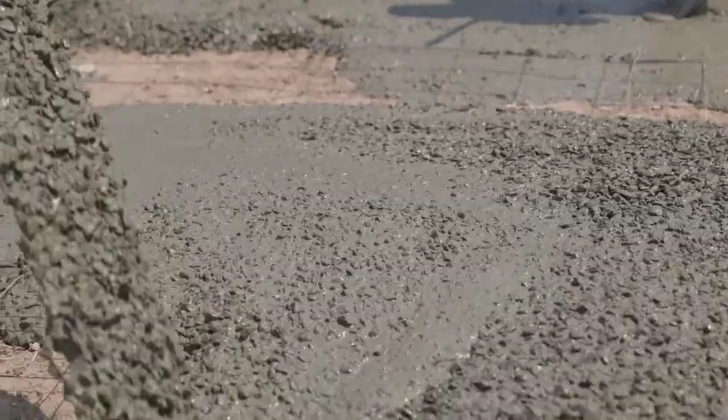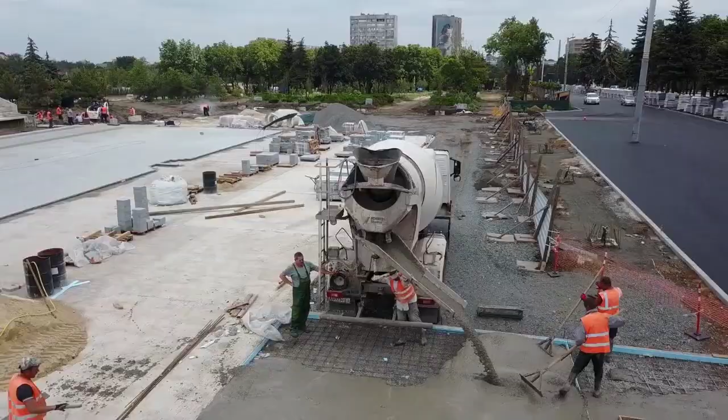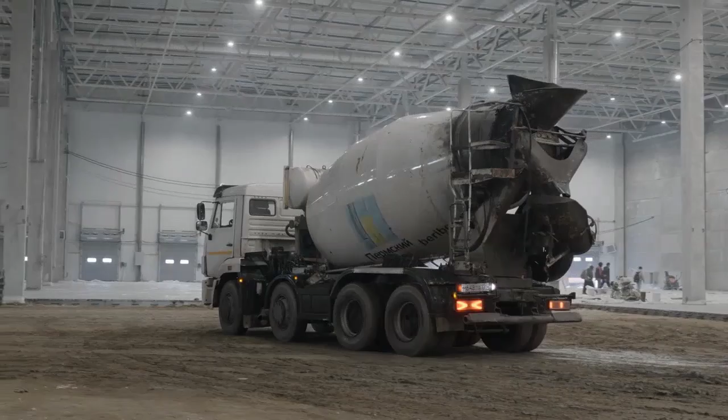Have you ever stopped to think about the sidewalks, driveways, bridges, or the buildings around you? They're all made from concrete. So why don't we discuss it more? In each episode of Concrete Logic, we'll explore a unique concrete-related topic with the help of industry professionals shaping the trade's future. We'll talk with suppliers, contractors, architects, engineers, specialists, and even proponents of competing materials. We'll get their views on concrete and their visions for its future. So get ready to mix things up with Concrete Logic, where we turn the spotlight on the material that's everywhere but often overlooked. This is the Concrete Logic Podcast.

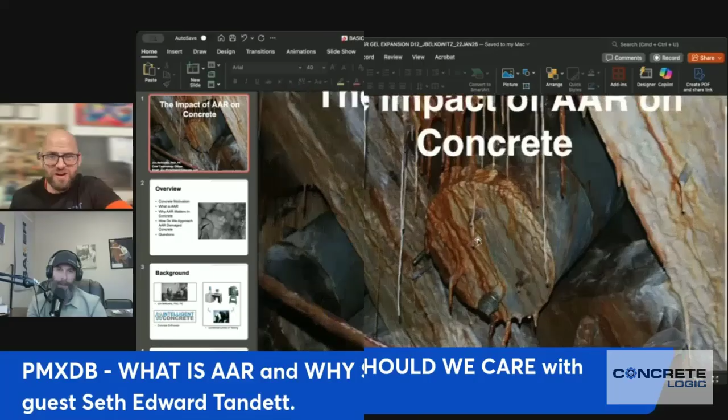Right, but it's not just rusty. Let me zoom in a bit more. There's something going on here, it's like oozing. Yeah, that's what I thought was the ASR, the gel. It is the gel. But what's accompanying it that makes it look like something from an alien movie is rust.

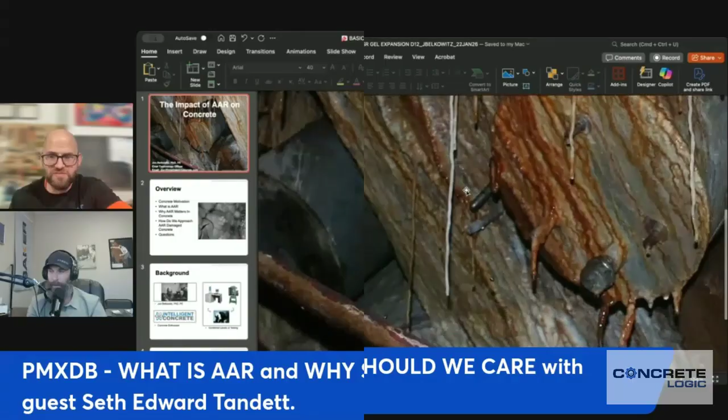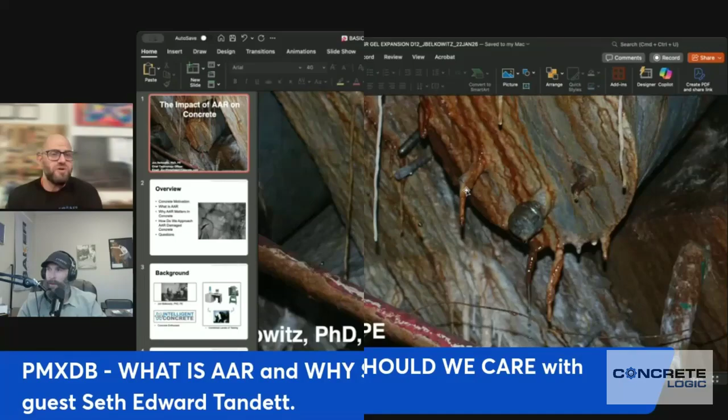So you called it out. What normally happens is ASR, AAR, any of those weren't the primary mechanisms for concrete failure back in the day, right? We had control of them. I'm talking the 80s through the early 2000s. But as we got into the later 2000s, moving from prescriptive to performance specs and driving the amount of fly ash, we started creating an environment more conducive to this reaction. The unfortunate reality is if you let ASR go and ignore it, or any of the alkali reactions, this is what it can turn into.

Like I said, ASR wasn't the primary mechanism, it was a secondary mechanism that led to more steel corrosion, steel popping out, tendons hanging out. Okay, now we have to do something. But now it's gotten to the point the reaction happens faster and so much more intensely that it's almost like, for lack of a better analogy, a blastoma in the brain. It's increasing the concrete size in a confined space, and normally that means it has to push the concrete up, develops almost like a muffin top, and our concrete softens from within. That's the biggest problem with ASR. It looks like a surface issue, but by the time it's gotten to the surface, you're up the creek without a paddle.

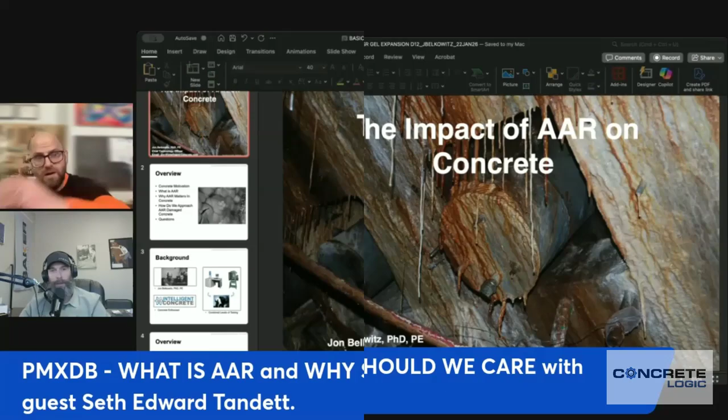Now, again, why would you care about it? Well, it's a sign something else is going on. We talked about this a bit on the Concrete Logic podcast, episode 145, released this week if folks haven't listened yet. We were talking about protecting the surface of the concrete, making sure we're doing a good job so it doesn't penetrate into the lower levels or layers of the concrete.

Yeah, penetrate. I like the word diffuse better. One, it doesn't sound sexual, and two, it's more direct. Normally the stuff we're talking about is water with some contaminant, like an alkali or a chloride, something nasty. It diffuses through the concrete. A paint or sealer penetrates, hardens, and then anchors itself. We don't want diffusion through the cracks and the pores. Does that make sense?

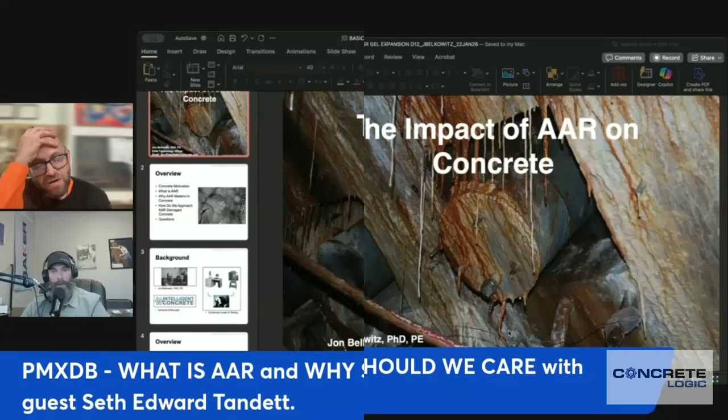It's already a sign there's moisture getting down to the rebar, right? There's corrosion happening and all kinds of nasty things going on inside the concrete. The crazy thing is the steel in our concrete, especially the most extreme steel.

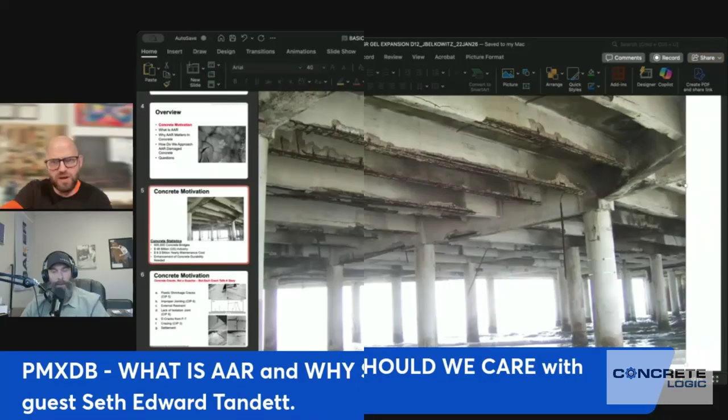I think I have a picture of it here, hold on a second. I love this picture, look at this. This is a picture that Brian Greene sent me for one of my books. This is Miami, a wharf, and this is the underside of that wharf that really gets all the salt spray. Maybe I should zoom into that a little more.

The concrete, when concrete bends, especially a concrete beam bends. So this is a concrete.

See, this is why I didn't want to do the flippin' blurry background thing. Can't see it. Yeah, there you go.

So when you have a concrete beam, these long things are beams, glued onto a concrete deck. Their job is to take the load that's above, and their job is to bend. Now in these top squares here, you're going to see them squeeze, while the bottom squares here are going to stretch. So when the concrete bends, the top is in compression and the bottom is in tension, almost like one of our flexural beams that we put in the compression machine.

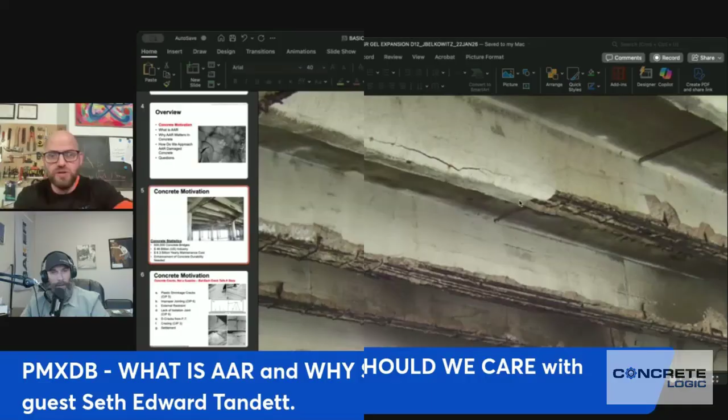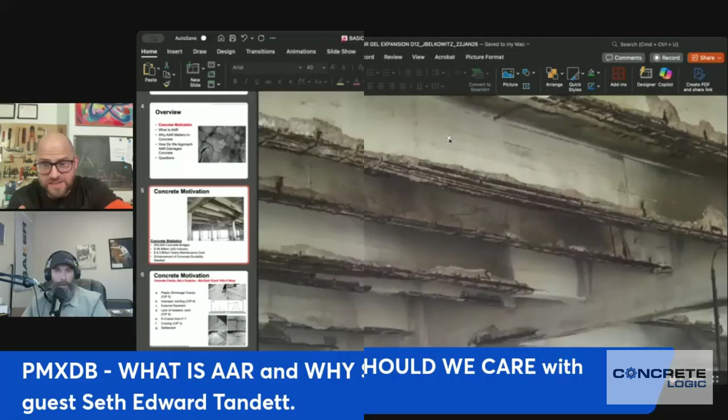So we put the majority of our steel in the bottom of our concrete beam, with 2, 3, 4 layers of steel. You can kind of see it right there, a whole bunch of strands falling into the ocean. So cool. But all that steel is protected by 50 millimeters, or 2 inches if you're not French, of concrete.

And the worst part about concrete is we know it's going to crack. Every crack tells a story, but that's why the good Lord started concrete with the letter C, because concrete cracks. Especially where we have a wetting and drying environment, the concrete swells and then contracts, it gets chlorides in it and goes through calcium oxychloride formation, and the concrete falls apart. Then corrosion happens. So this goes back to, we didn't really give a shit about ASR until it started compromising the entire concrete structure. And when it does that to the steel, that's the primary concrete failure mechanism. ASR was secondary.

Yep, I'm following you so far.

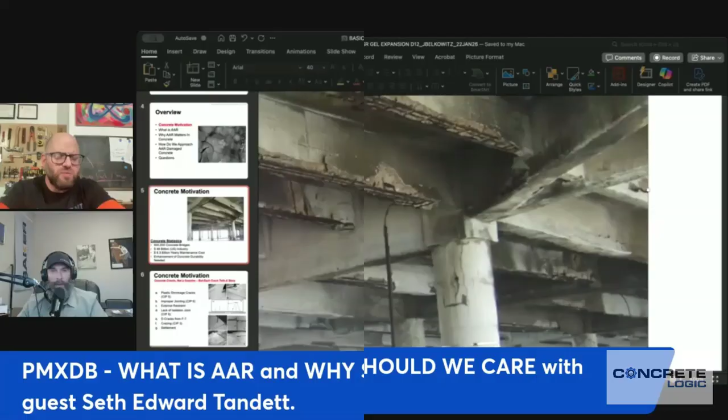Right, that's changed. Right now, before I show you pictures of job sites, I just want to give you a quick illustration of what ASR is. Is that cool? How do you minimize this? I don't know, you're driving, man. All right, enough of that.

In my opinion, the greatest mind when it came to alkali-aggregate reaction was the brilliant Michael Thomas, professor at University of New Brunswick in Canada. Mike was the expert for the Federal Highway Administration, and I believe he was also the expert for AASHTO and ACI on all things AAR, ASR. This was in the AAR facts book published by the Federal Highway Administration back around 2016, with a new edition. There are amazing case study stories, research, a lot of it led by Mike Thomas.

This is one of the bridges they took out or reviewed as one of the case studies. What you can see here is that part of the bridge infrastructure was covered by a soil embankment, which protected the concrete from freezing and thawing, wetting and drying. I zoomed in, and you can see a diagonal line that separates where the soil was on the bottom versus where the concrete wasn't protected above the diagonal line, and you can see this map cracking pattern.

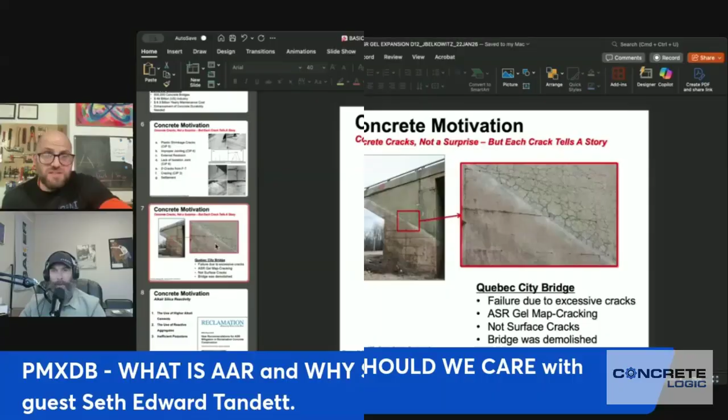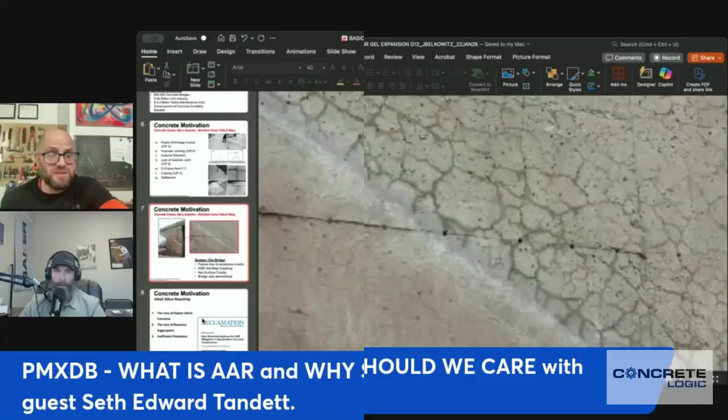That cracking pattern is indicative of alkali-silica reaction, something I said earlier, that every concrete crack tells a story. Concrete cracks don't happen by accident. When we see a crack like this, where the three legs are 120 degrees apart, almost perfectly, if you trace every crack, look at that. 120, 120, 120, 120, 120. That's something we call the Isle of Man crack, and it's very specific to alkali-silica reaction, or alkali-aggregate reaction, the more general term.

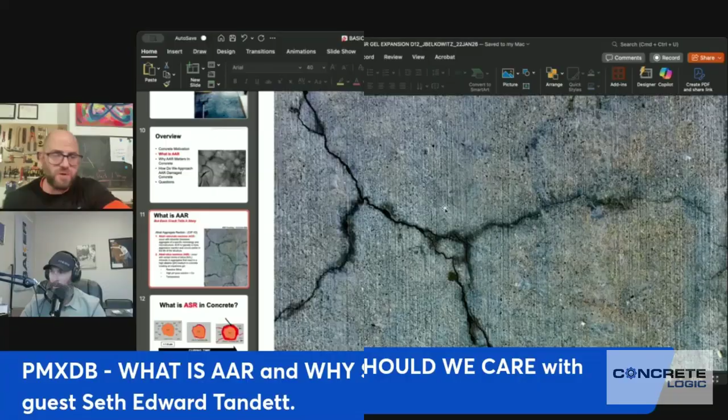But freeze-thaw, de-icing salts, shrinkage, plastic or drying, we don't get this type of crack. Now this comes from alkali-silica reaction specifically, which is a chemical-physical, mechanical reaction that goes after a very specific type of silica in our aggregate. That's why it's got to be a specific type of aggregate, not just any aggregate. It's a tetrahedral form of silica, which in a high pH environment breaks down and then reorganizes with those alkalis to form this expansive gel.

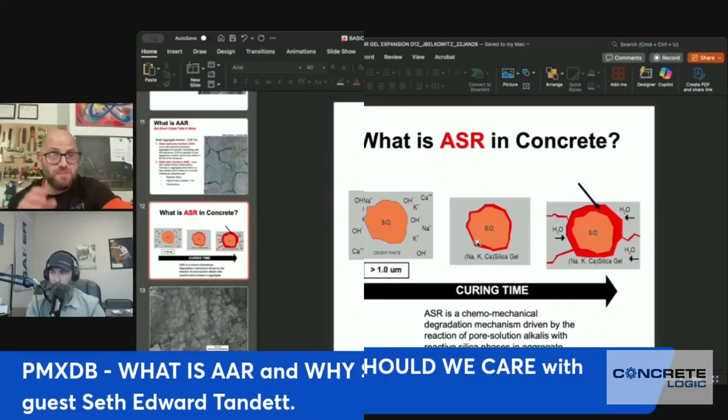Has ASR always been a problem, or is this a relatively new thing, or have aggregates changed over time? I want to say we first discovered it somewhere between the 20s and the 40s. In the 50s and 60s is when we did most of the research, and we had a good handle on it up until, I want to say, the early 2000s.

A good handle on it means if we had ASR, we just included SCMs, limited the amount of alkalis, limited the rock, did some investigation and evaluation to determine that we'd have reaction, and included those SCMs in the mix. That's ASR, and that's really what we've talked about.

If it's ACR, which is alkali carbonate reaction, that reaction is a little bit different. There's no cure for that. The only thing you could do is limit the amount of dolomitic limestone in your concrete to less than 20%. And that was determined back in the 50s and 60s. So most DOTs, most ready mix providers, most aggregate providers have forgotten that.

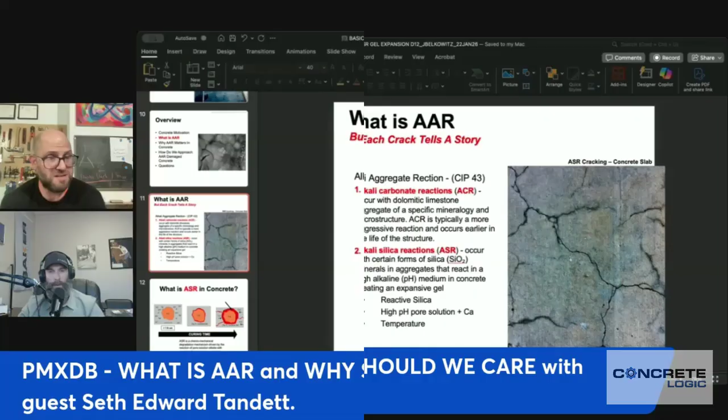And again, every crack tells a story. Concrete doesn't crack by accident. There's always a reason. And when this happens, you've lost your concrete structure.

Like ASR, you can seal it, you can grind off a little bit at a time. That was something Mike was known for. He represented a dam in British Columbia that grew 7 to 8 inches every couple of years, and it grew into and caused issues with the hydroelectric equipment at the dam.

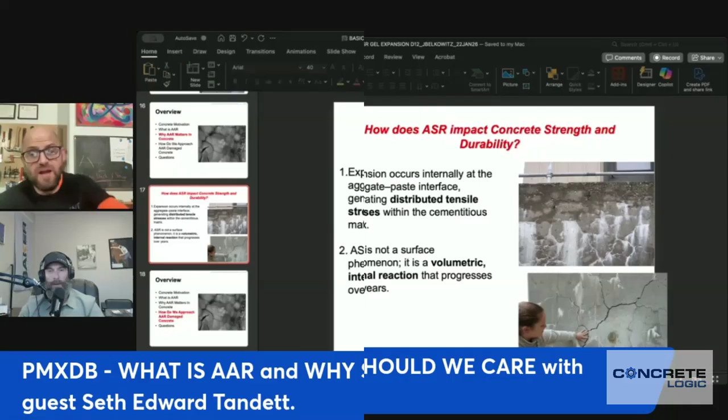So every few years, contractors had to come in and cut the concrete around the hydroelectric equipment. So if you're building, let's say, an elevator shaft for a parking garage or a multi-story structure, you cast it, you cure it, you rip forms off, everything looks kosher. Seven days later you come back and it looks like this picture on the bottom, especially with an elevator shaft, because that's all restrained. Now, can you use the elevator shaft if it looks like this throughout? I mean, this is ridiculous.

You've never seen this before, have you? No, not me personally. That's crazy. And you place a lot of concrete, don't you? I don't personally, but Baker does. Yes. I wasn't... I'm Baker. Sorry, when I say you, I meant the royal you. Baker does. Yeah, Baker does.

And the unfortunate reality is Baker is going to run into this. We are working with DOTs all over the nation that are asking, 'what the hell is this, John?' And why do we need to know about ASR or AAR or ACR? And that unfortunate reality is we are in a new era of concrete.

And if you're going to start looking for ghosts now, that's what it's called, where you start looking for concrete cracks. And when you have these types of cracks, it's just a matter of time until you have to act. When I say time, let's say your maintenance cycle is 20 years. Okay, that's when we place it, we come back 20 years later and that's when we have to maintain it. For you, elevator shafts, you don't ever have to maintain it.

I mean, this would be a year or a couple of years into building. Worst case scenario would be 7 days. How would you approach this?

Well, what I was going to ask you, what are some tests that you can do prior to a project? There's a number of tests, and there's so many arguments in the industry over this.

What we're running right now is something called son of a biscuit. We don't cuss on this show, by the way, Seth. Sure you don't, Seth Edward Tandett.

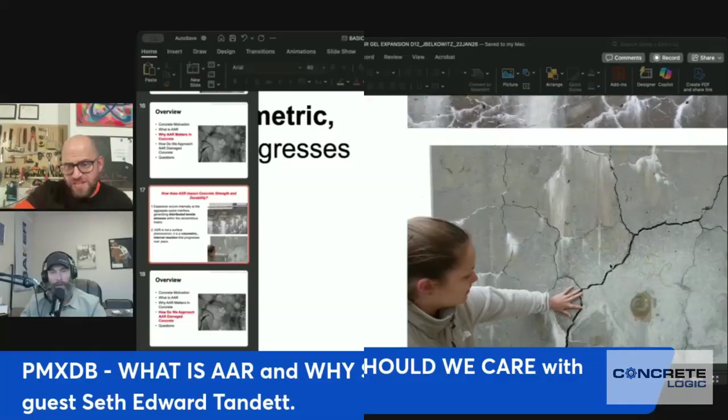Replacing this—I mean you can see this is on a small structure, and the structure above it too, if I could zoom out, this is a water reclamation structure. And it grows now. If it was just a sidewalk, even the sidewalk—I have a picture of a sidewalk somewhere—and the sidewalk balloons up because the sidewalk can't grow down. It's restricted. So instead of having a flat top, the sidewalk starts having a balloon top.

And normally what the township or the county does is they either grind it themselves, or they make you grind it as a homeowner, and they charge you fines until you do that. Now, you expand that same concept to a pavement. Same thing is going to happen in a pavement, even let's say at an airport.

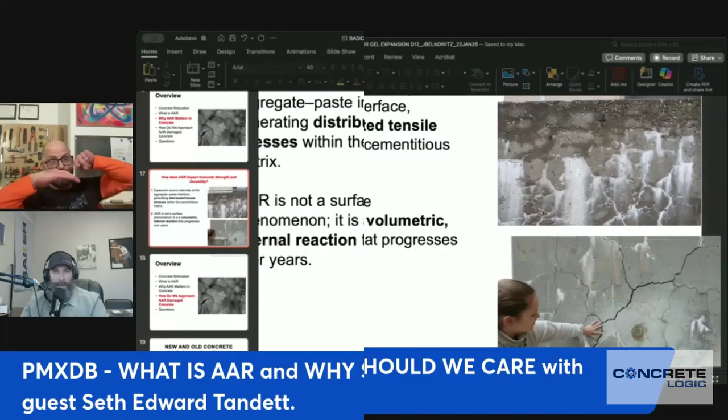And that's why certain airports have been tearing out pavements to the point that they have Mount Everests of concrete buried on the airport installation. But the same thing happens where you had a flat or a little bit of a crown pavement. Now because you've grooved it and you're using a crap load of de-icing salts, it's ballooning up a few inches every year.

And now it's either tear out the concrete and replace it, or mill it and grind it to a CSP of 3. What's CSP? Concrete surface profile. A polished surface has a CSP of 0. The more you scarify the surface, the more frictional resistance you have, or a BPN value, that force of friction.

Gotcha. Huh. I'm trying to sound smarter than I am. You know what I'm trying to say, right? Well, if I don't, I'll ask.

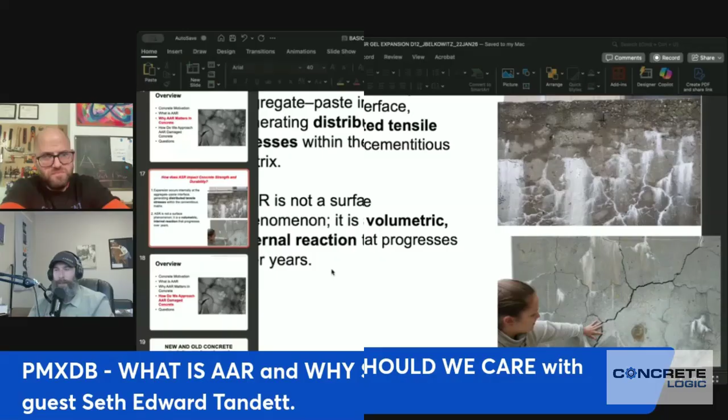I'm trying to say a CSP of 3 is less slick than a CSP of 0. A CSP of 0 is almost a polished surface. A CSP of 3 is like a ground up surface. Yeah, I'm blanking on another term. I'm blanking on it too. I'm trying to say it smarter, and that's my freaking problem.

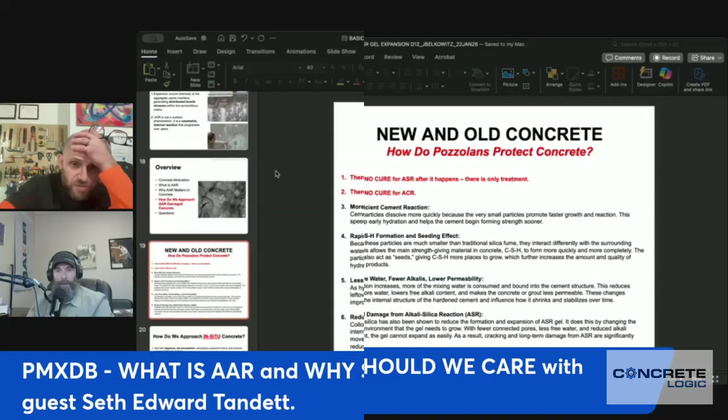So the next question is, how do we approach this? If you start seeing these cracks or some version of these cracks, I can go up a slide. They don't have to be big, they can be pretty gosh darn small. They could be the size of a softball or a baseball or fifty dollars. But again, it's these very specific cracks. It's trying to start annotating the ghosts. When you see 5 different ghosts on 5 different job sites, they don't happen in onesie twosies.

I use herpes as an analogy too. If you go to a nightclub in New York and you meet one person and they have herpes, it's guaranteed that 80% of the people in there have herpes. So if you see these Isle of Man cracks on one job site, especially if you use de-icing salts, you're going to see it on another job site. Once you see 5 job sites — even 3 is a coincidence — but if you see 5 different job sites, it's time to call in a specialist.

Have them core it out. Actually you don't even need to core it out. James Instruments, Humboldt, Gilson sells a field ASR kit. You can buy it yourself, it's like $1,400, $1,500. Buy it yourself, do the test. Bob's your uncle — if it changes color the way it's not supposed to, then you call one of your local specialists.

Have them core it out, and they could do another test. It's literally a spray of dye on, put it under a special light, boom boom boom. You take a core and then do petrography? It's called petrography, but let's not make more of what it is — you're literally spraying a dye on. That's the first place to start.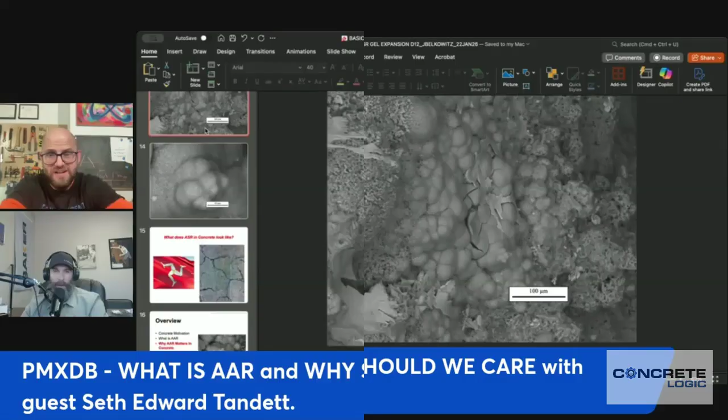And once a student sees this, it's like, oh yeah, there it is, buddy. How pretty is that? You don't get that with anything else. This is called an ASR gel rosette.

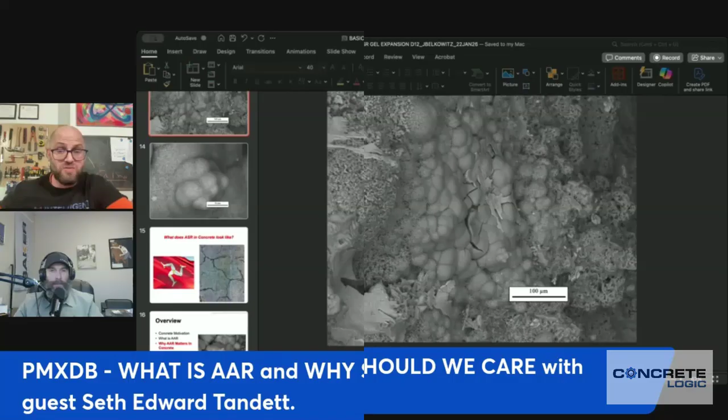If you want to read a good paper, there's one written by the great Kim Kurtis from Georgia Tech, from her PhD in 1996, on soft X-ray gel morphology for alkali-silica reaction. It's not a paper, it's a work of art. What she teaches about the fibril-like morphology is something I teach to the university class on fibril-like morphology in steel. The morphology is so important, especially with ASR and the destruction of concrete.

If we can control these wispy-like fibers, we control the ASR. You control the spice, you control the universe.

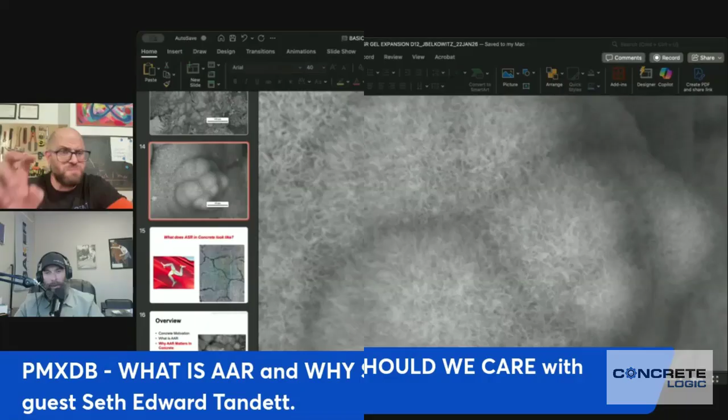Is that on the surface of the aggregate? It's between the aggregate's interfacial zone or surface and the paste. There's something called the interfacial zone, an open space between rock and paste where there's not a lot of paste anchoring the rock in. That open space gets filled with pore water solution, which has a very high pH. That pH attacks the silica in the rock at the surface, the silica breaks down, and it creates a gel that expands in that space. That's what starts causing the cracking.

It's amazing until it starts getting scary, right? It's just a fun thing to talk about until... here's a beautiful pavement, right?

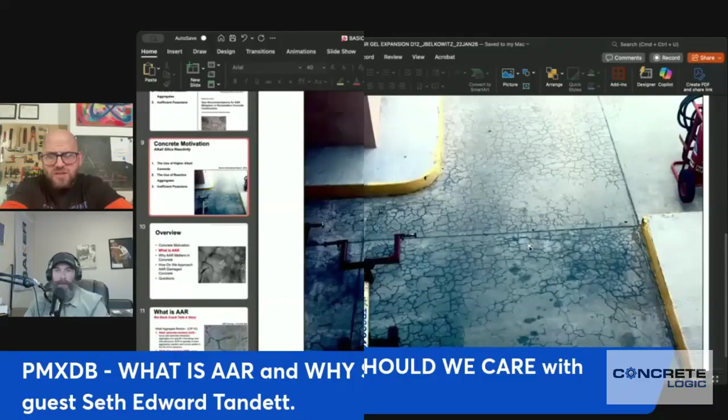This is at an airport. Looks like alligator skin, looks like a city map. It's not crazing, because crazing happens faster and goes from surface to subsurface. Here you can almost see the concrete pushing up, and you can almost see the stress lines, these circular patterns, where it's easier for the concrete to expand on the edges than in the center of the slab. So the cracking seems to be happening more on the edges.

Well, yeah, that's where a lot more of the salts are collected. The reason it's not cracking as much in the center is because the expansion takes longer, since there are not as many free edges. There's more restraint on the circular pattern than on the edges, and that restraint is holding it back. Gotcha - it'll get there eventually.

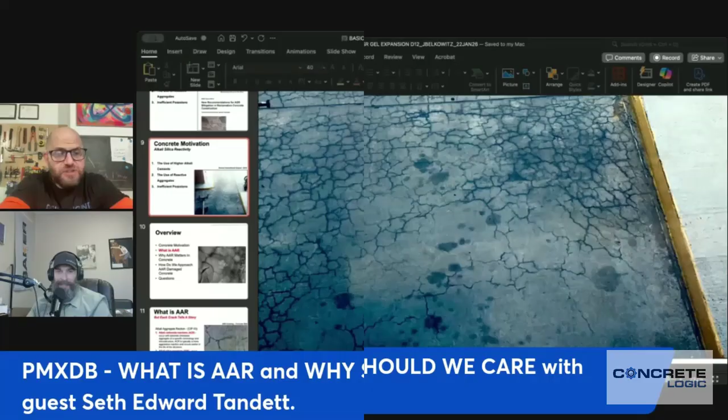Oh my gosh, yeah. And especially at airports you have something called FOD - foreign object debris or foreign object damage. With most fighter jets or jet aircraft, you just need a handful of rocks or washers thrown into the engines to destroy the entire aircraft or make it incapable of taking off. The same thing happens with concrete that starts spalling and flaking. When you get enough pop-outs and flakes, the runway or taxiway becomes more of a liability than a wearable surface, because you can see where the cracks start interweaving, and we start losing not just the top surface but the subsurface and the rest of the body of the concrete.

All right, well we went way over time. We have some good coffee, we had good conversation, we had good people. So the intro was the best. We'll wait for the outro - you're going to love the outro.

So next time on the podcast, what I'd like to talk about is why this is happening in my neck of the woods. Why are we seeing it from coast to coast, when we haven't worried about it for the last 60, 70 years?

Sounds interesting - yeah, that's all we do here, buddy. Well, thanks for letting me come on here. My pleasure.